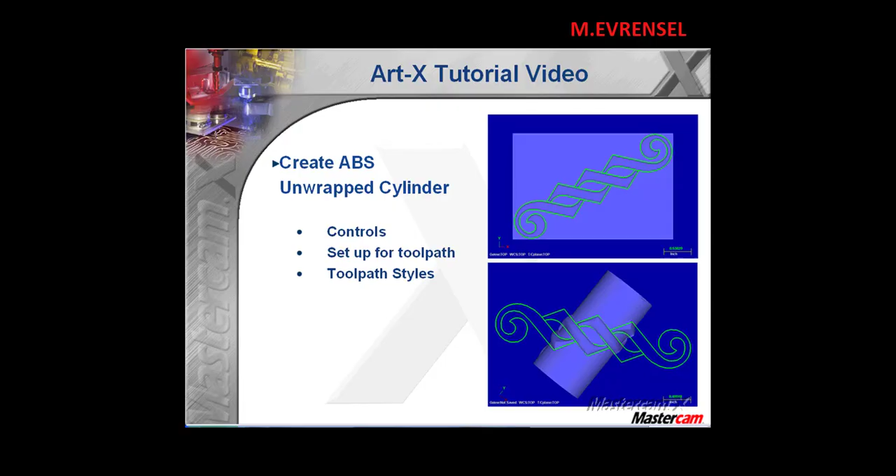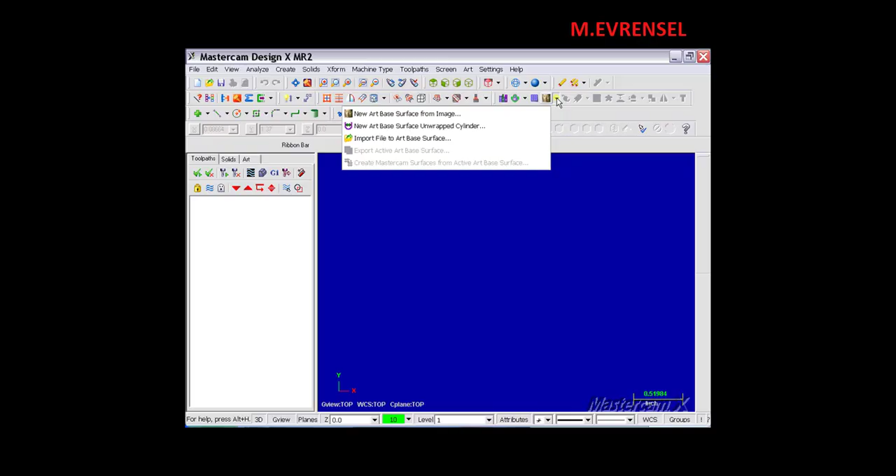Welcome to Mastercam Art X video, creating a new Art Base Surface from an unwrapped cylinder. If we go up to our art toolbar and select this drop down, we can select New Art Base Surface Unwrapped Cylinder.

So what we want to do is specify a known cylinder, and Mastercam will automatically unwrap that flat so we can create all of our art on it, and then we can wrap it back up using X or Y substitution in toolpath. We can also simulate that in art, like with a graphic simulation.

Our first control here is the diameter of our cylinder. The second one is interrelated with it and tells us that for a 1-inch diameter cylinder we have an unwrapped length of 3.1416. The next icon you use if you need to call out a specific ring size for jewelry. We'll not use it at this time. We'll use it on a future video.

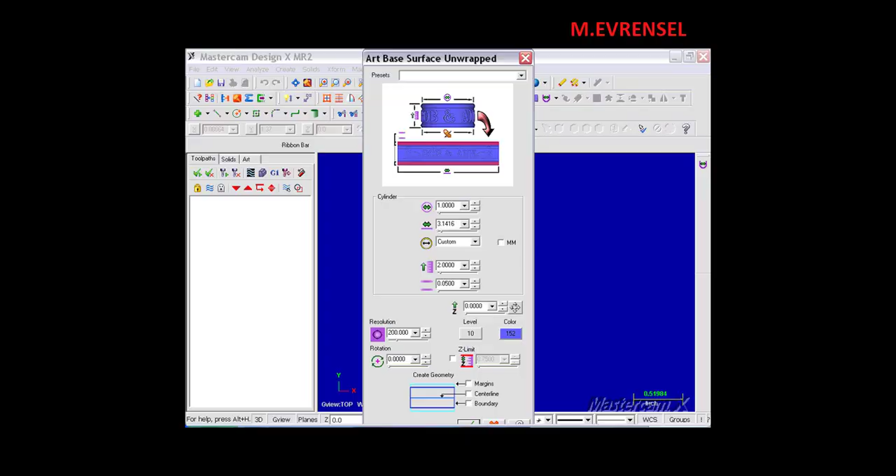The width of our cylinder is 2 inches. And down here we have a margin which allows us to make our cylinder a little bit wider, so we can start off the cylinder, machine the entire cylinder, and finish off the cylinder so the whole edge will get machined. Down here we have some extra geometry creation options. We can create the margin line, a center line, and the boundary of the whole object of the cylinder. And then we can hit the check and create our surface.

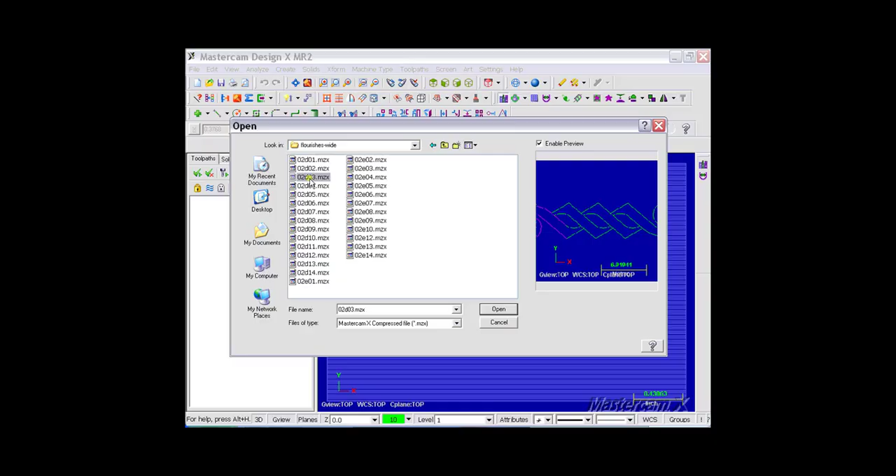The next thing we'll do is create some quick geometry and create a surface. So we'll go to Art, Library, and then we'll go to Flourishes, Wide, open that, and we'll pick this one, double click on it, accept that. We'll grow it up a little bit by hitting our plus key, and then we'll rotate it using our L key for rotation left, and we'll just put it in there for a quick diagonal by clicking the left mouse button.

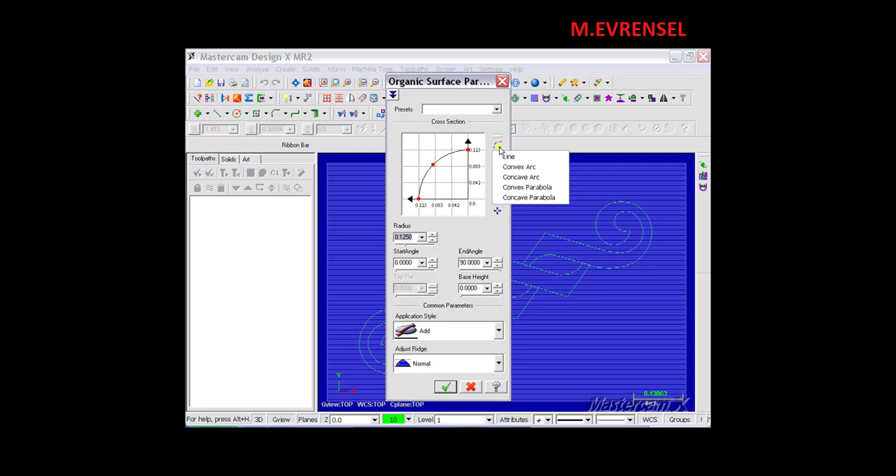Hit the escape key, and now we'll go to organic, and we'll chain this object, pick a convex parabola 1/8 by 0.125, and now we have a surface. Look at that isometric view, and we'll shade that.

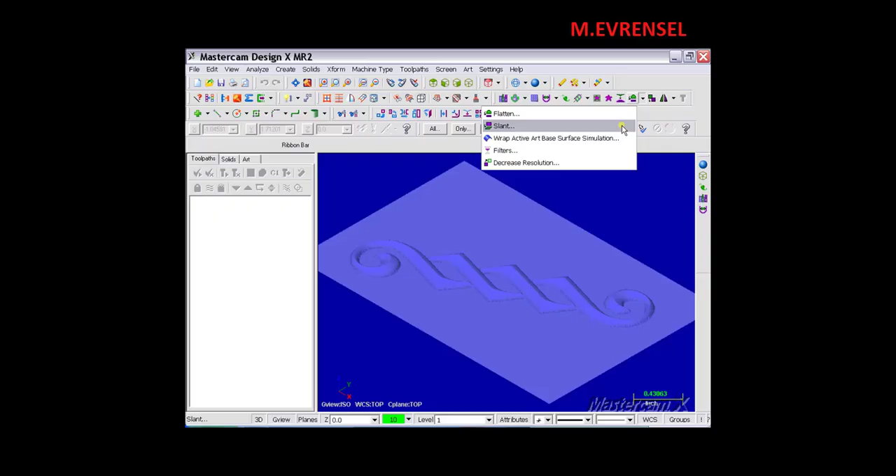So here's our surface. Now we can wrap that surface by going over to this drop down under Edit, Wrap Active Art Base Surface, and it will already translate from the previous dialog when we unwrapped the surface what the wrap radius is. So this should allow you, just by hitting the checkbox, to get your wrapping.

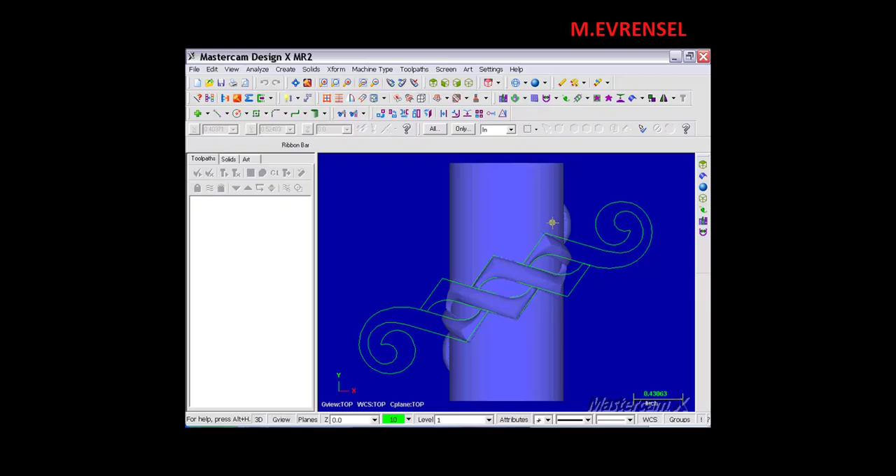If we go into the top view, we can rotate this around and take a look at it by hitting the Alt key and using your arrow keys. We can see that we've wrapped that up. Go back to top view and isometric.

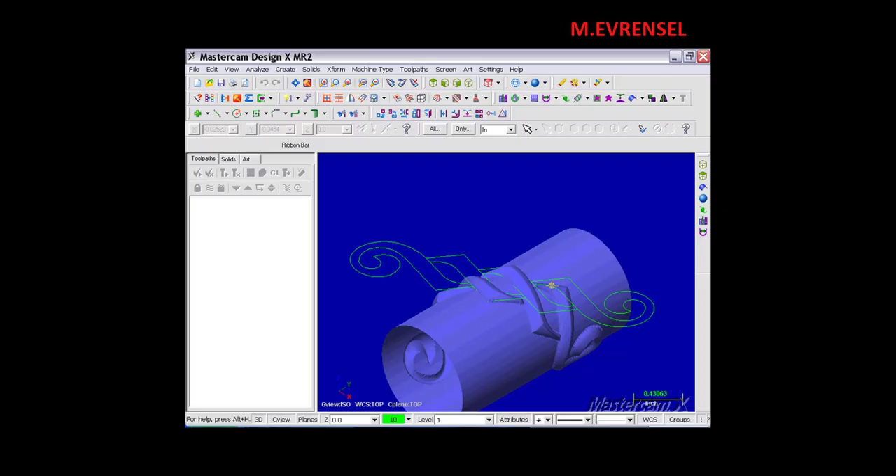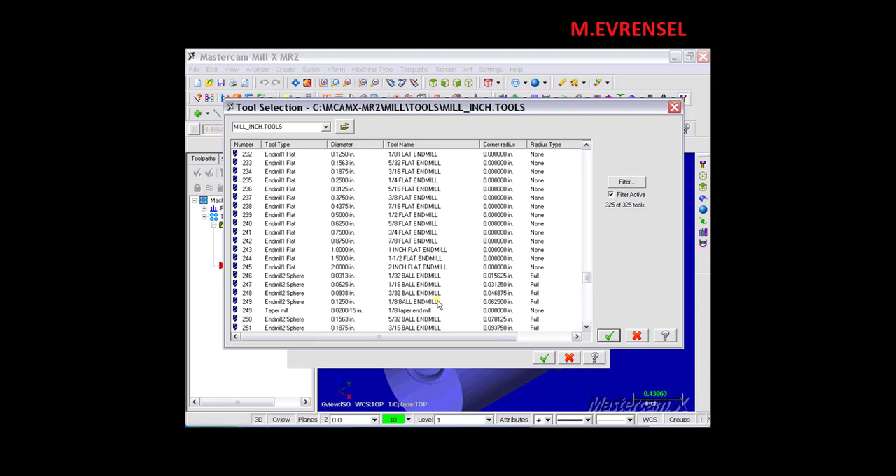Now let's toolpath this. So we'll go to machine type, mill, default, and pick the toolpath icon. Select the tool library. We'll pick an 1/8 inch ball end mill right there. And while we're in this first page, we need to turn on rotary axis, because what we're really going to do is generate a flat toolpath and then allow Mastercam to wrap it.

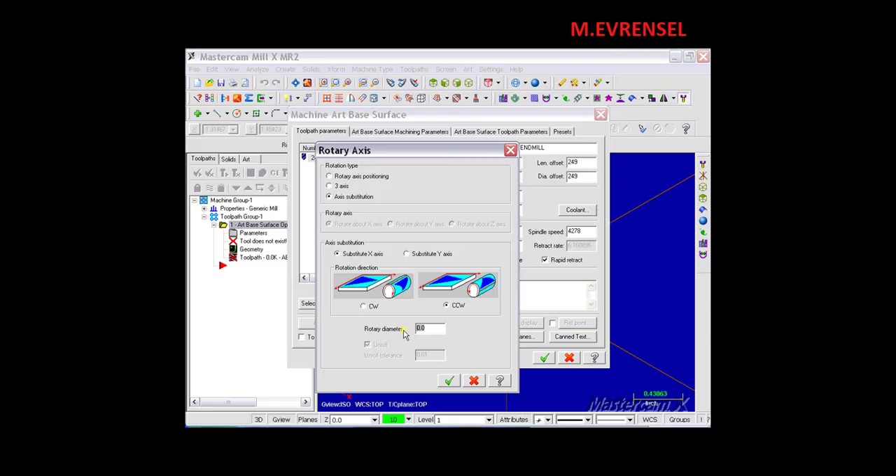After selecting the rotary axis button, we find ourselves in the rotary axis dialog. First thing I want to do is set up for axis substitution, and since our rotary axis is set up pointing down the y-axis, we'll actually be substituting our moves on the x-axis. Our rotary diameter is 1 inch, like we set up in the original unwrapped cylinder dialog. Hit the check there.

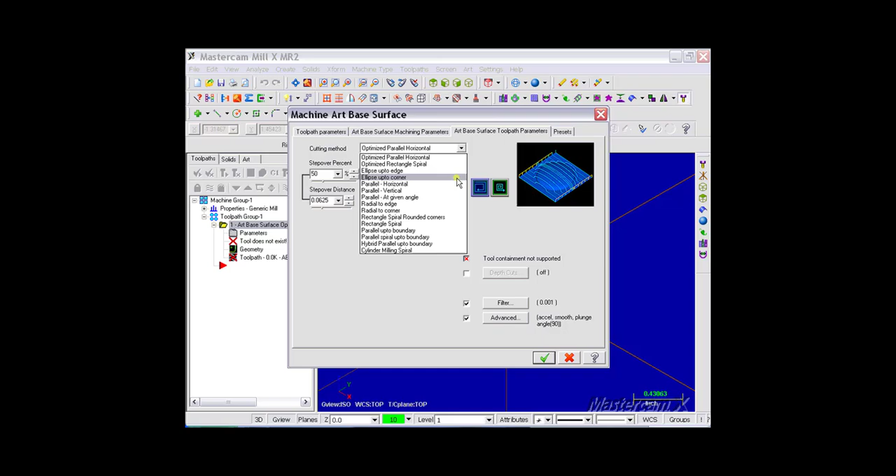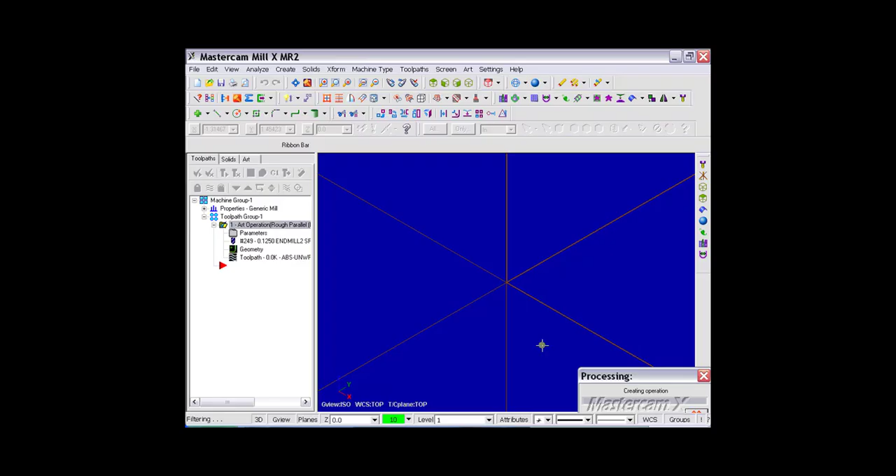Now we'll go to the Art Base Surface toolpath parameters. Our cutting method will be parallel, horizontal, zigzag. Percent step over will be 10. Pick finishing. We will turn off the pre-filter. And then we're ready to go to generate the toolpath. I turned off the surface and the geometry so we can look just at the toolpath.

And then we can go into backplot and we can see the tool move around the cylinder. And we can speed that up just a little bit. Actually slow it down a little bit, and we can see that the tool is moving around the cylinder to show us a rotary motion. In actuality, the cylinder would be moving and the tool would be stationary. And we can speed that up. And let's play that again so we can see it works through the whole part.

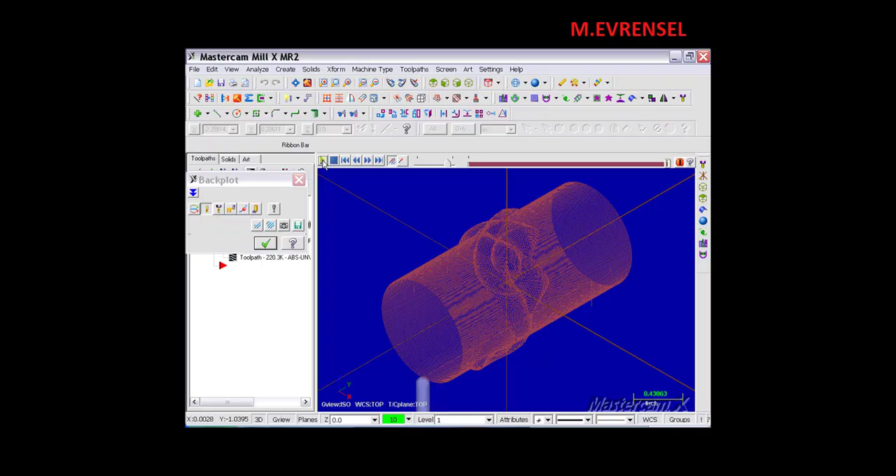Another toolpath style, or cutting method. If we go back here and go down to cutting method, cylinder milling spiral, unlike horizontal, will actually cut at a little bit of an angle so you don't get a line where the zigzag reverses direction on the bottom of your part.

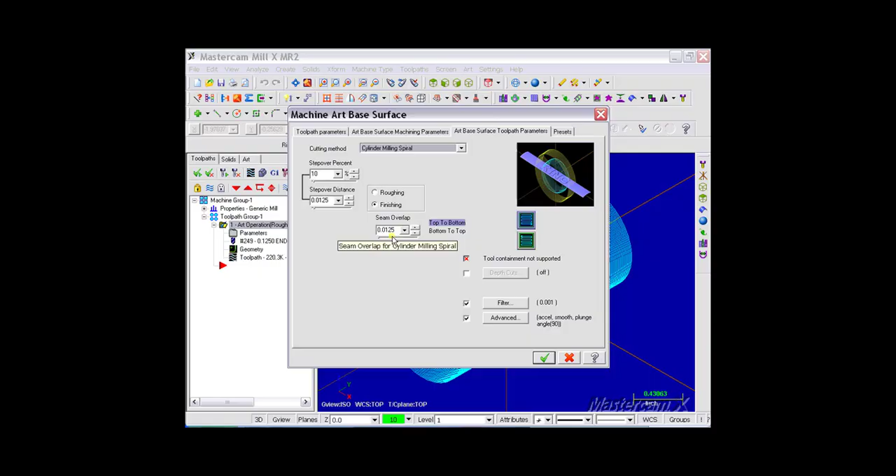So we're going to say finishing, 10% is fine, seam overlap, good. The cutter will actually cut over the seam by 12.5 thousandths. Go top to bottom is fine, filter, everything's good here. And we'll generate this toolpath.

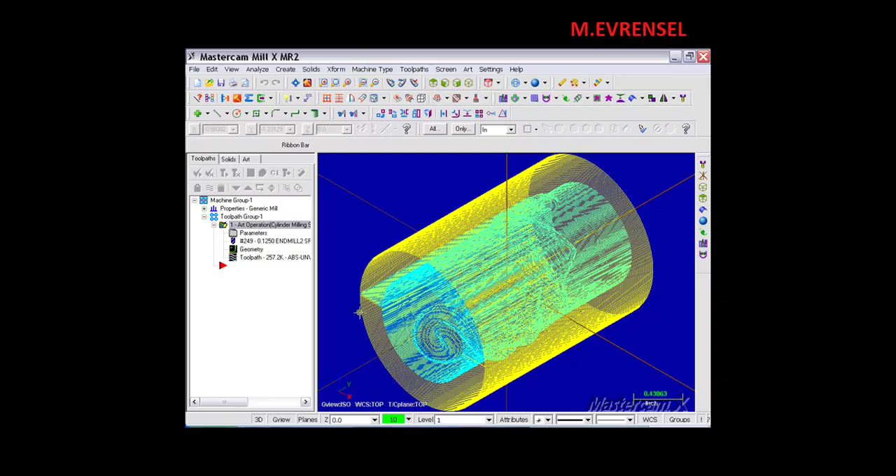So in this toolpath, what happens is the cutter goes down, cuts around the ring, rapids back, and then cuts around the ring again. So it's cutting in one direction. This also is helpful, like the parallel zigzag path, in that it unwraps your rotary axis each time. So the rotary axis doesn't continue to wind up. Sometimes rotary axes, if they do wind up multiple times, have to unwrap multiple times before you can use them again.

This concludes Art X video, create new art-based surface unwrapped.